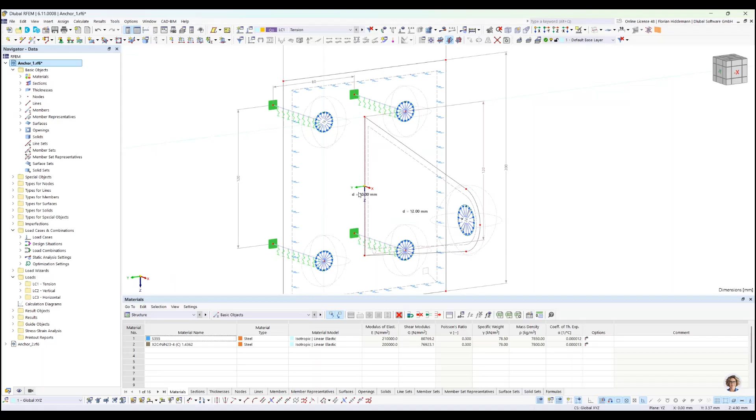Thank you, Andreas, for the nice introduction, and welcome to this webinar regarding optimization together with the add-on stress-strain analysis. What I would like to show you today is a small model where we want to optimize the geometry, in particular the plate thicknesses and the length of this plate. In the first step, we only play around with the plate thicknesses, and the second model will include some changes to the whole geometry of this plate as well.

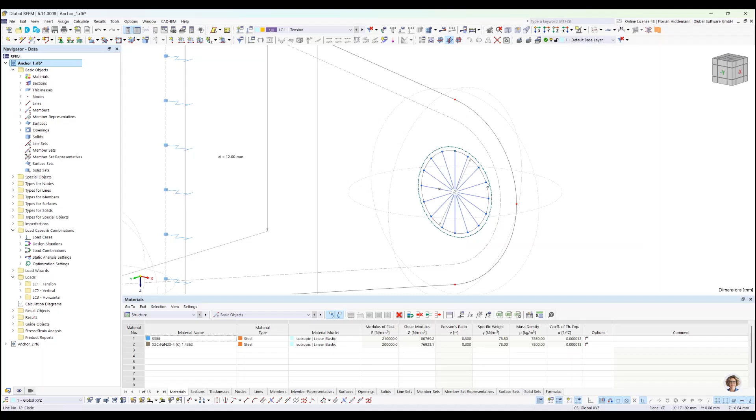This will be the only model we have a look into today. I would like to show you the basic initialization, the setup for the add-on optimization, and how it works together with the stress-strain analysis. We'll do some design setup here as well, and I'd like to point out some nice details in this model, for example how to properly model some screw connections, or how to get a more realistic result regarding applying loads on holes like this, with a backend plate using a non-linear support for the surface.

So just to walk you through the model we are looking at today, the overall goal is to find a geometry which fulfills all our specified design needs and achieves the minimum weight of the whole construction. So let's assume it's a facade connector or anything like that, and we would like to improve the material costs for several of these connectors.

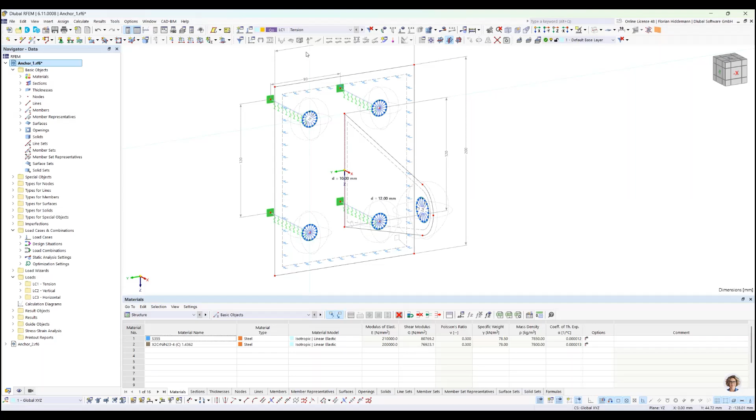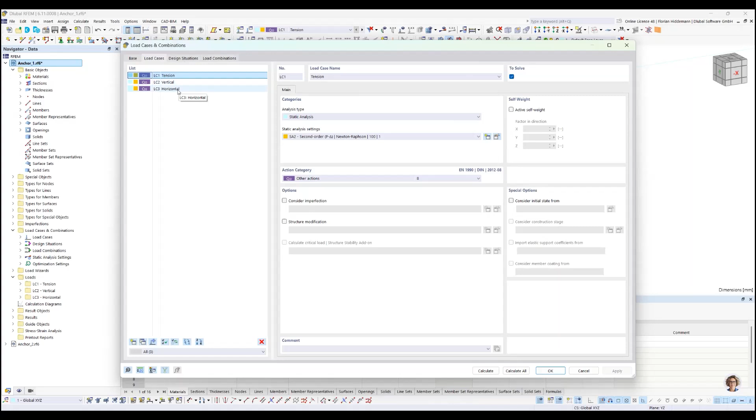Let's start with the loading. Here are three simple load cases defined. The combination wizards are turned off. We only need for this small example a design situation which contains some loads and design criteria used in the design add-on, and we have tension, vertical and horizontal force, just as other actions.

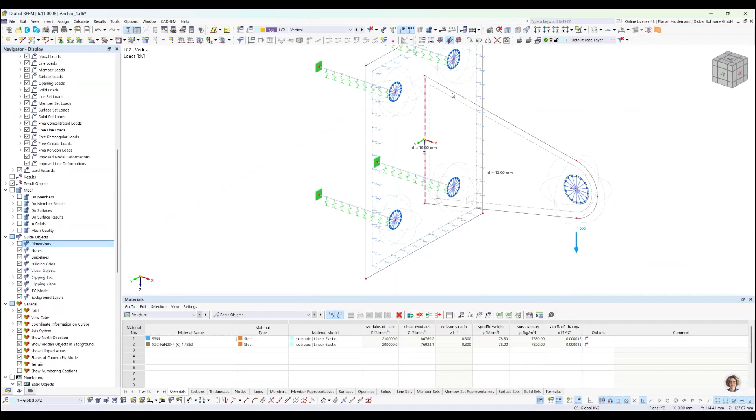And the forces here are applied on this single node behind the dimensioning. Let's turn this off for a moment so you can see it here. There is node number 10, and we apply a tension force in this direction in load case 1. In the second load case, we have a vertical force and a horizontal one, which will bend this plate around the weak axis.

So how is the model working? As you might see here, we have some nonlinear members. And if I activate the transparent model, you can see that these try to simulate a weak beam section here.

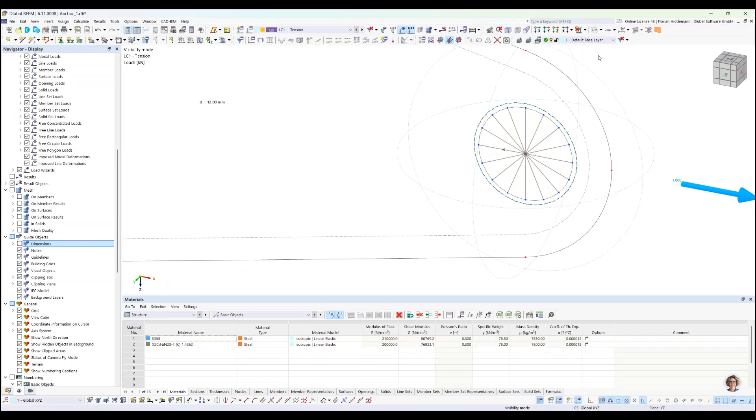The model dimensions for these beam elements are chosen in a way that the surface area of the connecting part for the beam end is the same as the area for the cylindrical surface inside this model. So if we make them invisible and show the transparent model, I choose a surface here where you can calculate with the diameter and pi the surface of the cylindrical area, and then model some beam elements which would have the same area.

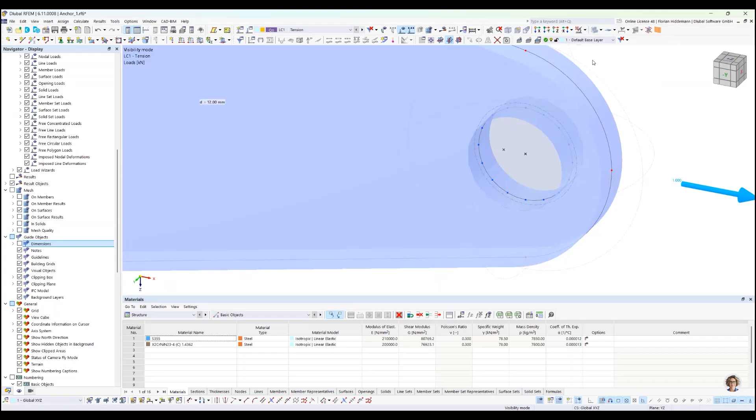We made some good... this is our recommendation for how to model this kind of screw connection, to have some effects regarding displacement of the hole itself and let the force find its way into the connecting plate here.

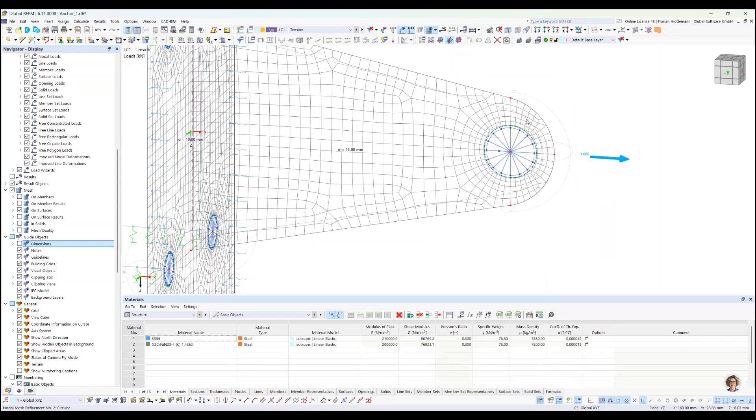Around the structure, there is a mesh refinement, so we would like to see a finer and nicer mesh in this area. Here is a radial node mesh refinement defined, circular. Even if this is bigger than the connecting plate, you can see that we have a nice structure for the mesh.

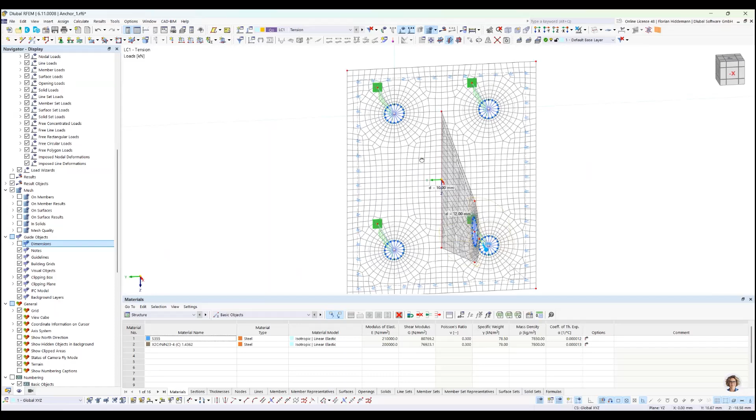On the plates itself, there are also defined some mesh refinements which make smaller elements, just to ensure that we have a good looking, well distributed fine mesh here. The same is done with the holes in the plate, which model the screw connection to the building. There's a circular node mesh refinement with the same settings as before.

The whole back end plate is supported with a nonlinear surface support. This is just to give a more interesting example, as if you have concrete under it or a filler or whatever, modeled with failure if negative contact stress, so we only can transfer positive pressure forces, and we are free in both lateral directions.

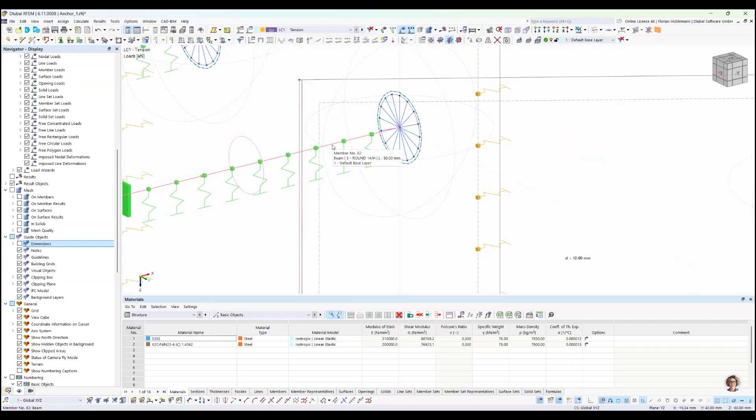Connecting to the center of these holes, there are beams with a round diameter of 14 millimeters. In this simple example, they just represent some dowels or anything connected into the building, and they are filled out with glue or something. I'm sure in your project you have the right and correct assumptions for that, and they are also supported.

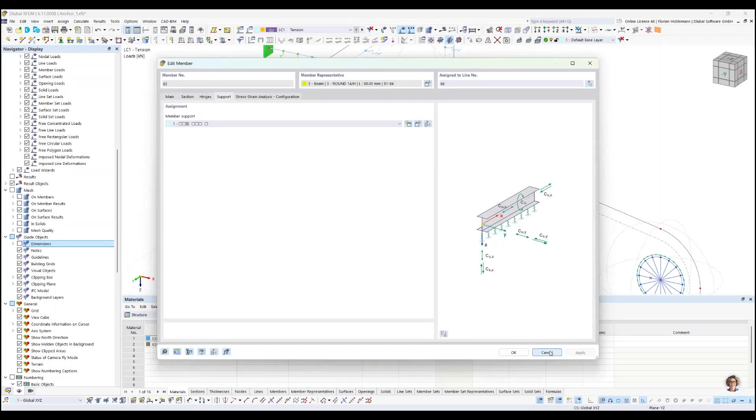All around to restrict the movement here with a spring constant that also simulates some bonding inside the first 80 millimeters of this connection. So it's a small example here, these are millimeters. We have these dimensions here to get an idea of what we are talking about.

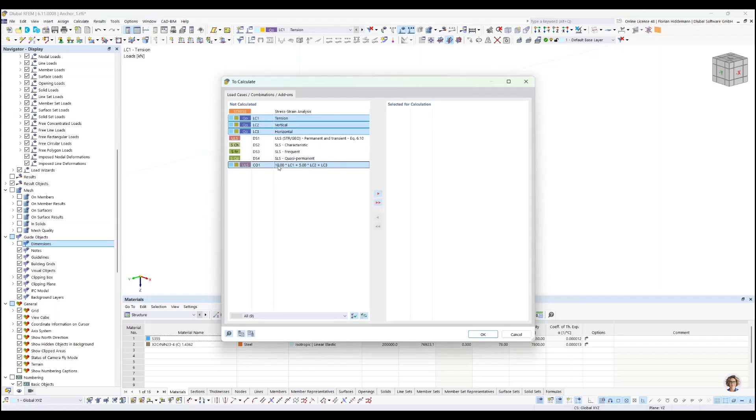Okay, and to get a feeling for the system behavior, let's just calculate for now the static analysis. And after that, we will set up the stress strain add-on.

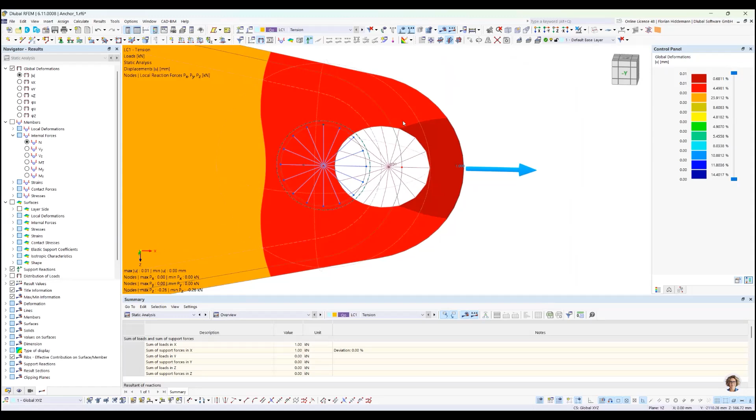If we have a look at the deformations, you can see we are pulling with the tension load case here, and the hole is deforming as well. It seems that we apply pressure only on this side of the hole, like we intend. The plate here is obviously deforming in a way that we can expect some contact stresses, which would add some small forces to the bars.

We can see this as well. If we pull with 1 kilonewton in this direction, we get 0.26 in each bar. So it's a symmetrical load, but a little bit higher than expected.

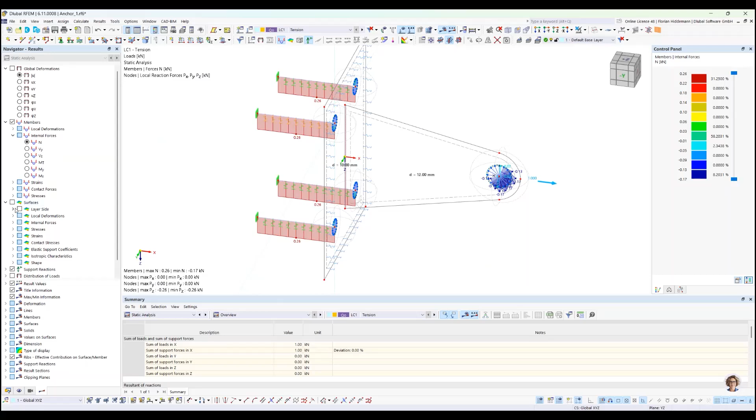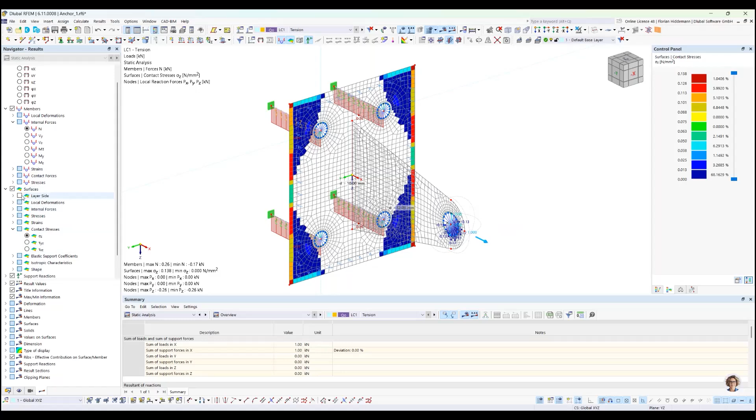Maybe you can see this in the contact stresses. Here on the edges, because of the plate deformation, you get additional forces due to the fact that the band and plate is leaning against the building, and applying another lever arm, let's say, on the bars here as well.

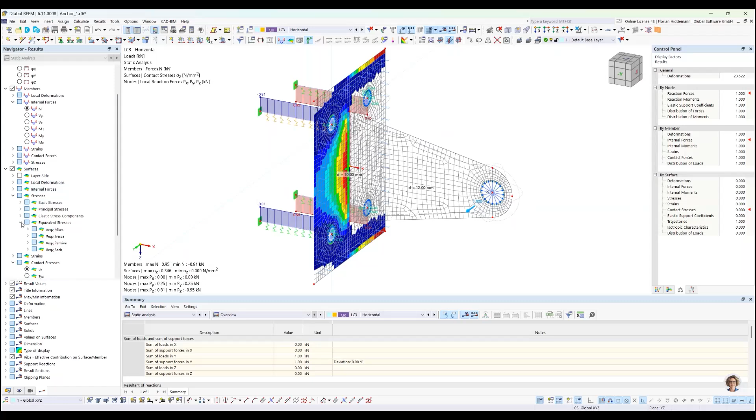So it's a little bit more interesting. In the vertical direction, we can see we have pressure forces here on the bottom side. Here on the upper part, it's free, it's a nonlinearity. And if we bend it on one side, horizontal, we also see this in the normal forces. And if we switch on equivalent stresses for the plates, you might see that we are dealing with a logical system here.

Okay, and what do we do now to add some criteria to dimension it properly? In the stress-strain analysis, we have several options to define limits, and we start with the surface configuration.

Because we have defined some material here, we make use of the parameters in our material library. So the add-on for stress-strain analysis will use the parameters from the material and limit normal stresses as described here in these formulas.

What is important to know is that the design add-on here uses totally different results than the static analysis. So if you limit sigma 1, sigma 2, and for example this equivalent, it might have the same results also in the static analysis, but it's calculated based on the design checks defined here on the right side.

So if you have sigma 1, for example, you can check here what is calculated behind it. And if you want a user-defined limit for this, you can also input the absolute value you want to use, or define a user-defined factor. If you don't want to design for 1.0, you can, for example, restrict this to 90% of the allowed limit according to the used material. So you are free to edit these values here.

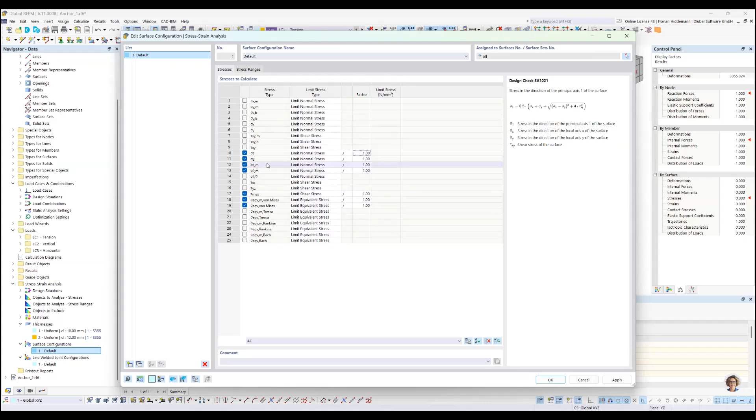By default, they are mostly according to your standard and code you have defined in the background. You can even change the factor here if you want to multiply that by 2, to allow double the allowed value. You can do that as well. But here in the default state, we check these parameters, and these are then in the following criteria to say this is a valid or not valid result. This is important for the optimization algorithm later.

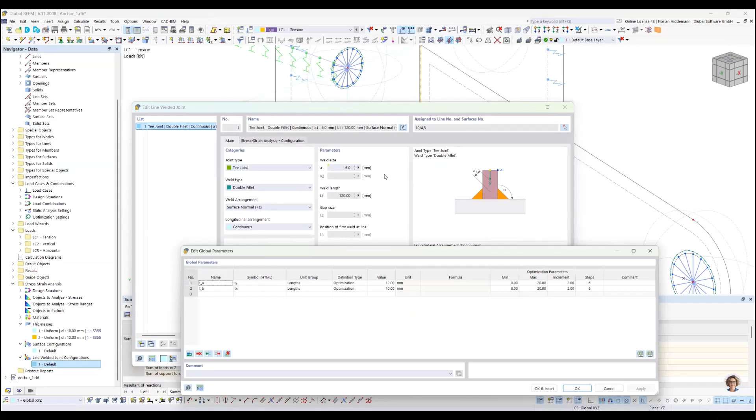We also defined a line weld joint, and in the model we can see it here. It's defined between both of these plates, just makes it a little bit more interesting here. It's a T-joint, double fillet, and the weld size uses the global parameter we've seen before. It's half of the measure of the plate thickness, so on both sides you have 6 millimeters for the weld joint here.

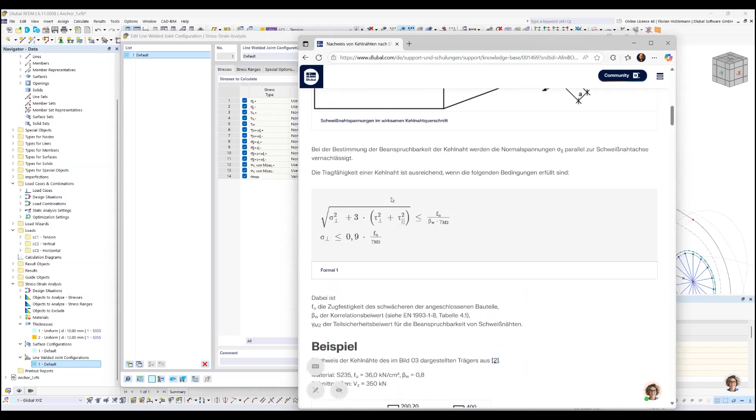And there's also a stress-strain analysis. Maybe you know this article from our knowledge base—it's also available in an English version. Here you can see we have an article on how to calculate and design check such joints. According to that, I calculated, you can also find it in Eurocode, the stress limits I will make use of here.

At the moment, this line welded joint doesn't take it automatically from a material and make these assumptions, so you have to calculate them on your own and define them as user-defined limit stresses. If I do it for material class S355, you can see that we have 436 for the comparable Mises stress, and for the normal forces in direction of the back end plate, we use 353.

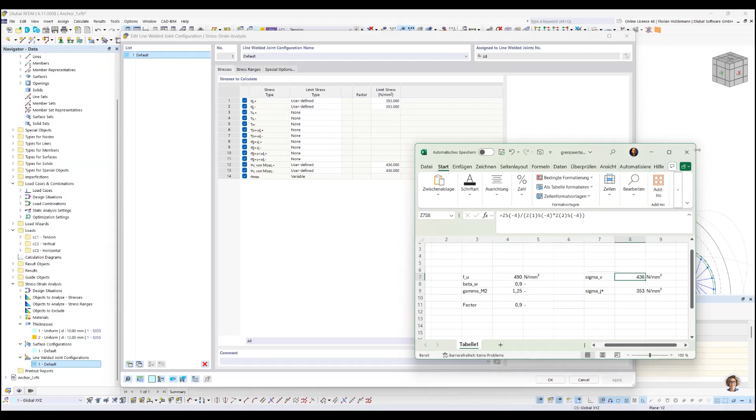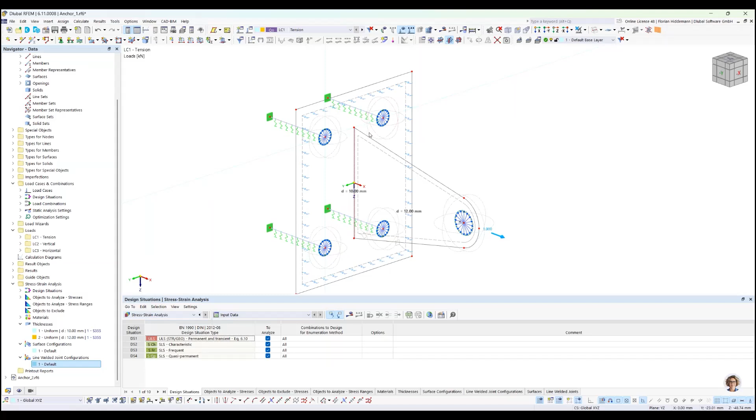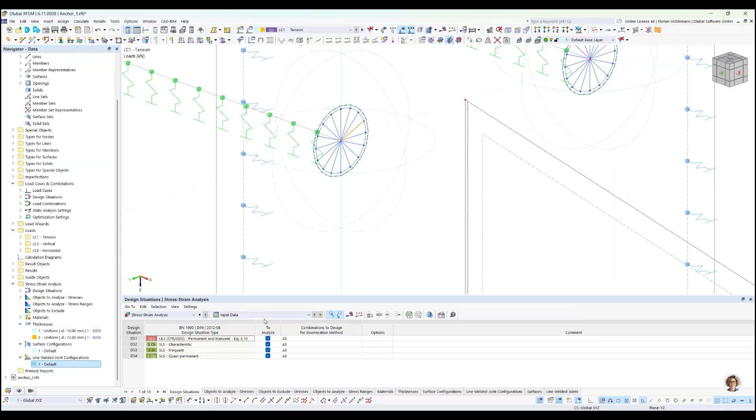Also, the last configuration is about the beams here. You can also activate these beams, and I will show you this in the example. If you switch here to the stress-strain analysis, obviously we don't want to calculate all these other members we have here because they are only used to model the forces on the plate. Yeah, we can have a look at them. These have a non-linearity and they fail if they get tension forces, so they only apply pressure forces and have a custom flat cross-section, and we don't want to have them in the stress-strain analysis, but we would like to see the other members.

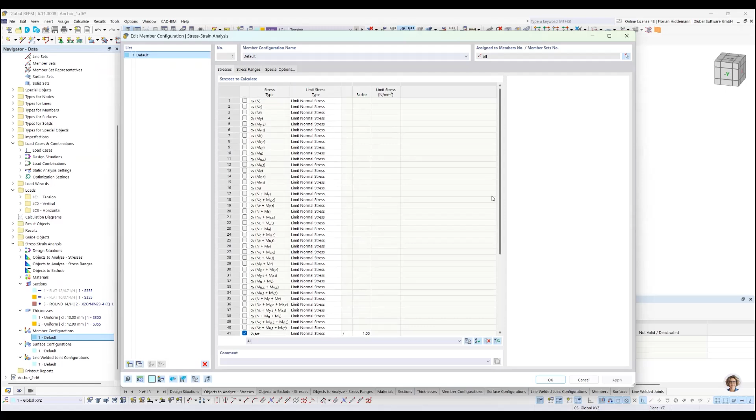You can go just to the input data and define the objects where we want to analyze them. So I just manually select these 4 members. And now you can see here, we saw sections, and we also have now the sections here and member configurations. In the member configuration, there are a lot of different options to edit the limit stresses, the limit normal stresses here. We just go for the standards, which make use of the material parameters, but obviously you can use a lot more information here.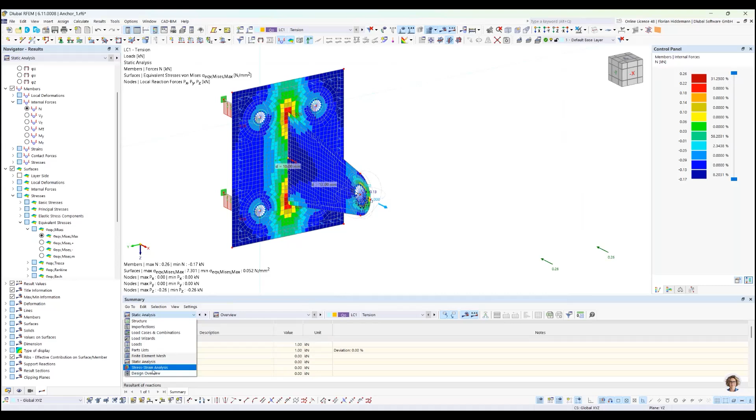So for now, let's see how the system reacts. If we calculate the stresses now with the current configuration, let's see what happens. We go to the stress strain analysis, to the governing results, and see, yeah, this would work. We have a valid result, but maybe this isn't the optimal configuration. So how do we go with this? How do we find an optimal dimensioning goal?

Just to remember, we have the global parameters here defined, which we make use of. So everything that is a global parameter can be used for optimization. If you do it like without the add-on optimization, you have the ability to define these as a value. But if you have the add-on optimization activated, you can define these as an optimization type. We make the simple version today, we don't go for ascending or descending options, it's just optimization, and then here on the right side there appears the optimization parameters.

You can define for each parameter the minimum, the maximum value, and increments and steps here. So in total, we would have seven states for this variable which we want to try out, and 7 states for the other one, including the minimum and max value.

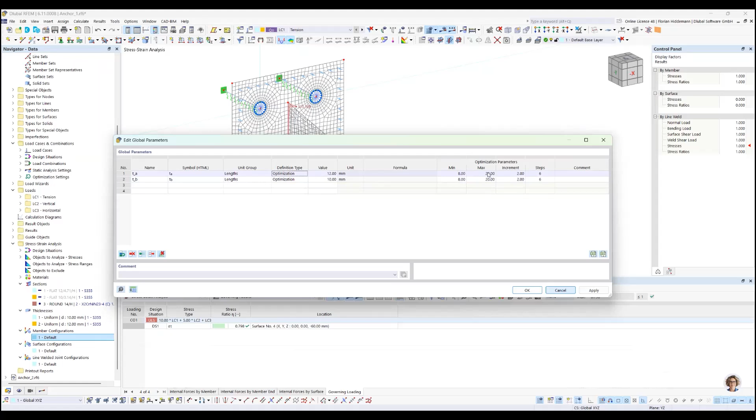Under the menu for calculation, you can find the optimization settings. In the optimization settings on the right side, you see these global parameters which are set to optimization. Here you can also define later on if you want to make use of them, vary them in the way specified with minimum, maximum, and the steps in between. This has an influence on the number of possible mutations. If we have 7 states for the plate thickness A and 7 for B, we come to 49 possible model variations.

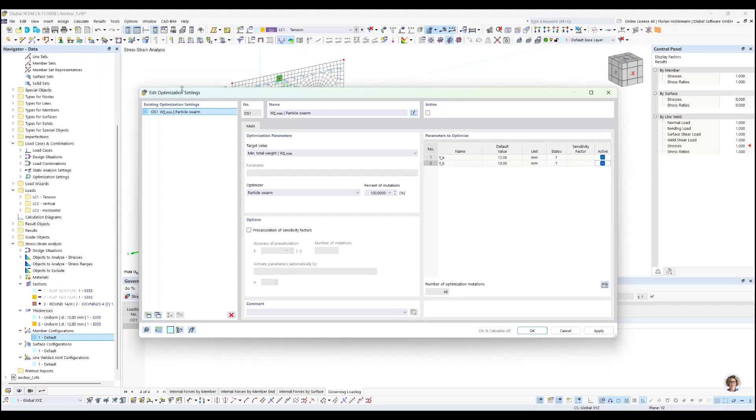In this dialog, we set the overall goal, the target value. This is one of the most important settings here. There are also some other options, and in the future we would like to add formula-based evaluations or other result types to give more flexibility regarding your optimization goal. But at the moment, these are internal concepts. So for today, we optimize for a minimum total weight of the construction.

For the first example, I would like to use the optimizer 'all mutations.' This is a dumb method that varies all possible states. The clever part of this add-on, which I'll show you later, are the algorithms we can make use of, which try to follow a more scientific strategy to find the best possible parameter settings in the shortest amount of time. So for now, let's calculate with all mutations.

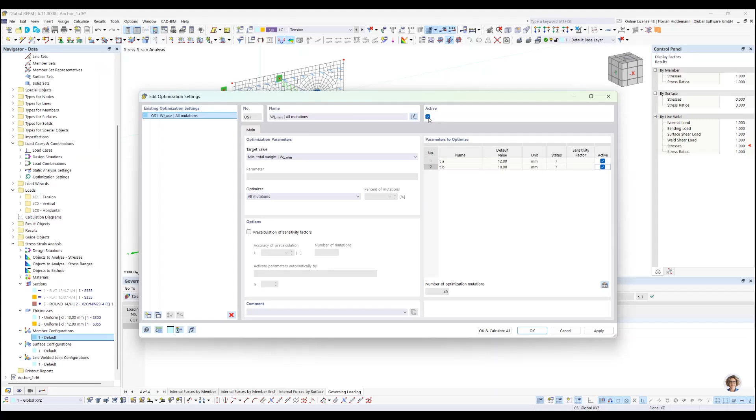What's important is that every time you want to make use of such an optimization run, you have to set it active here. If you calculate now and reopen the dialog again, this will be deactivated. It's a mechanism that tries to avoid unwanted calculation runs one after another.

So what will happen now? We won't calculate all 49 possible mutations because we have some clever strategy inside this model. In the background, it will now try to calculate the models until it finds the best valid one.

What the add-on optimization does now is varying our two parameters, and it evaluates with the target value here. The red exclamation mark means that our activated design add-on has at least one design check which doesn't fulfill the design limits. So if any design check exceeds 1.0, or whatever is defined there, a red exclamation mark shows that this is not a valid result.

If we found a valid result, it will be a green check. There is also a third option which we'll see in a few seconds, because we try to save time here. Now we have just a calculation with all possible mutations, but soon we will see that with a special combination in this example, we will have a valid result, and then something happens I'd like to show you. This is kind of an internal improvement.

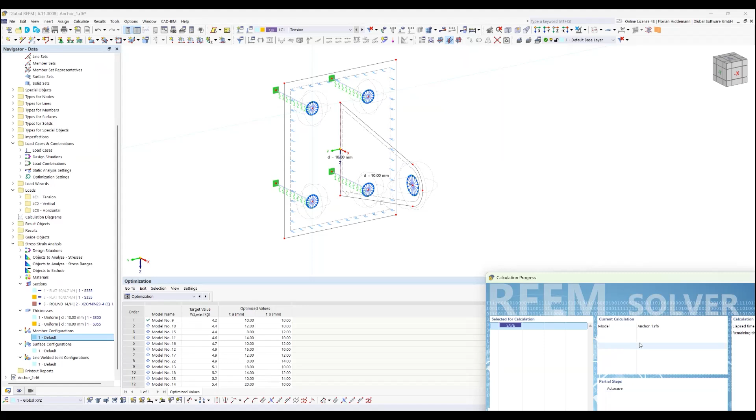We see that no combination with plate thickness of 8mm leads to a valid result, but now we have 10, 10 as a valid combination, and suddenly we jump to the end of the calculation run without calculating 30 more variants. Why is this the case? You can see here that there's also a blue marking which says, okay, these are not calculated.

The optimization add-on found model number 9 with 4.2 kilograms as a valid result. And it calculates in the background what follows from the geometry. If you take this geometry, you can calculate without calculating the RFEM results by stresses, design add-on, whatever else. You can also say, okay, these parameters will lead to a weight of the construction of 5.4 kilograms or 7.0 kilograms.

And since all these results would not be as good as our model number 9, we skip the calculation of the design add-on here. So it saves a lot of time until there is a possible mutation which would lead to a better weight than 4.2. And since this is not the case, because everything that could be better than 4.2 was already calculated as not valid, we skip these and have the best one in the result.

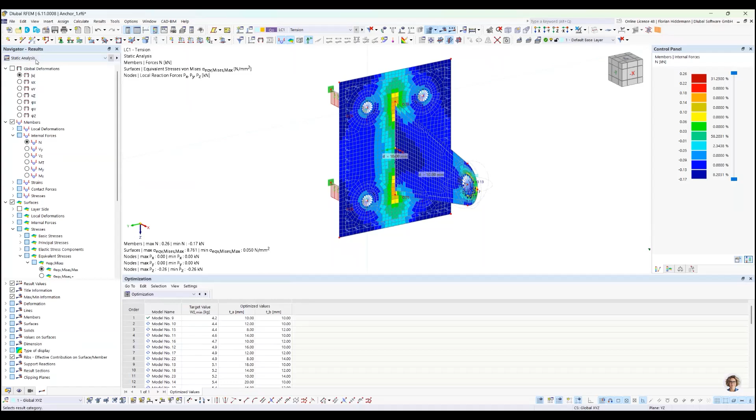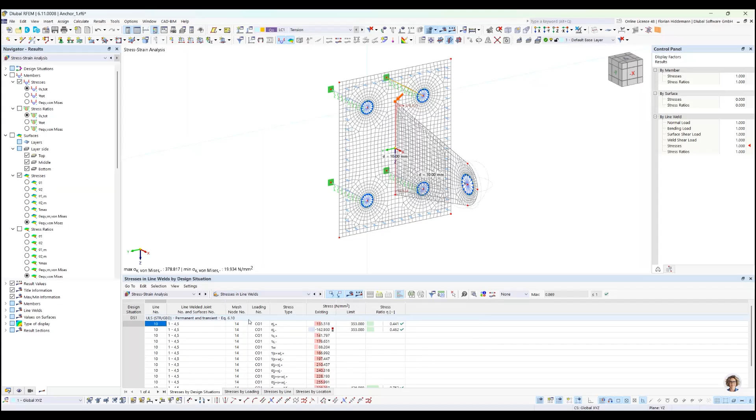So we can check in the stress strain analysis and see in the governing results we have around 90% as a maximum usage, and we found the combination 10 to 10 for the plate thicknesses. This includes the evaluation for the members here for these 4 bolts. It includes the stresses which are set with sigma 1, sigma 2, and the von Mises equivalent stress, as well as our custom defined stresses in the line weld.

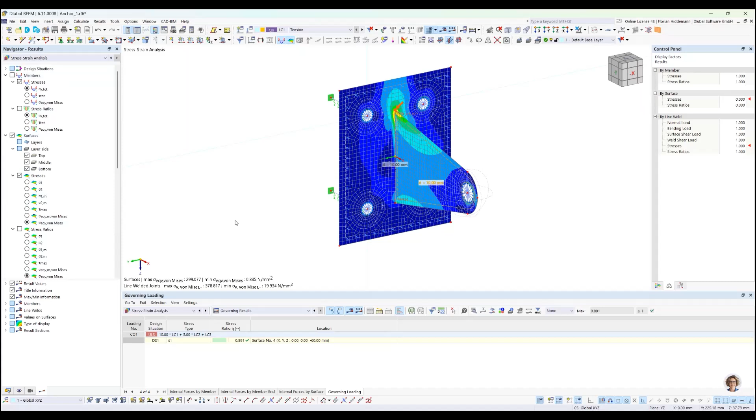So that's it. The add-on gives feedback to the add-on optimization, what is valid, what is not valid, and varies these results. And with 49 possible mutations, it's

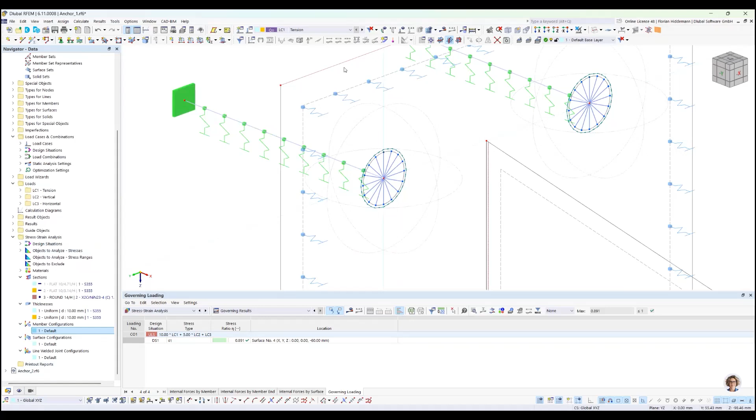affordable to just have a look at all of them, but it gets a little bit more tricky if you have further parameters. And now we are enhancing our example here, and later on we compare this with a pre-calculated version here.

So what we want to do now is also make some variation for this part. I already measured it, for this length here for the plate where the load is applied. Therefore, we go to the global parameters, make a new optimization variable, because this is the one we want to find in this small example, and we vary it from 80 to, let's say, 140 with steps of 10.

So it tries to help me here with some assumptions. Sometimes you have to move back and forth because it's calculating 6 by 10 and then the end or beginning value. And as you can see, we have now a third variable here.

And with this variable, maybe you already know, you can use these formulas directly into some coordinates or other input fields. And just to demonstrate that it's also possible here, we can use a formula directly in the global parameters, calculate some coordinates here.

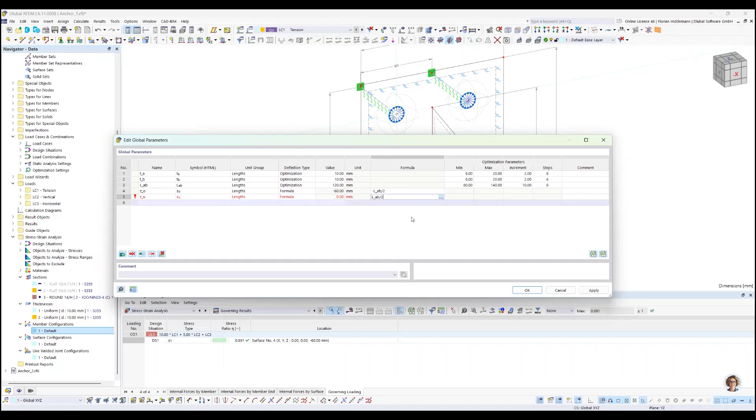That's half of this length. And now I use them here as the z coordinate for this node. So this is the upper part. And also for the lower part.

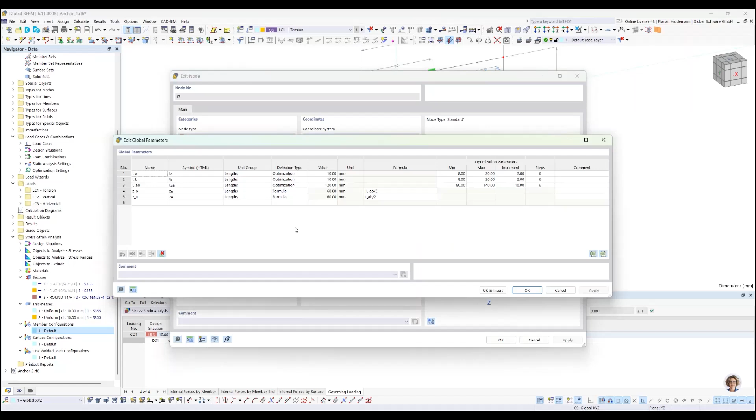Okay, and now we have another option here. And if you change this value, we can see this directly affects the model. And of course, with a lot of fantasy, you can build some more or less very complicated models with formulas and calculations, volumetric bodies, which are constant geometry, etc., whatever you might want to model. For this small example here, just gives another variation.

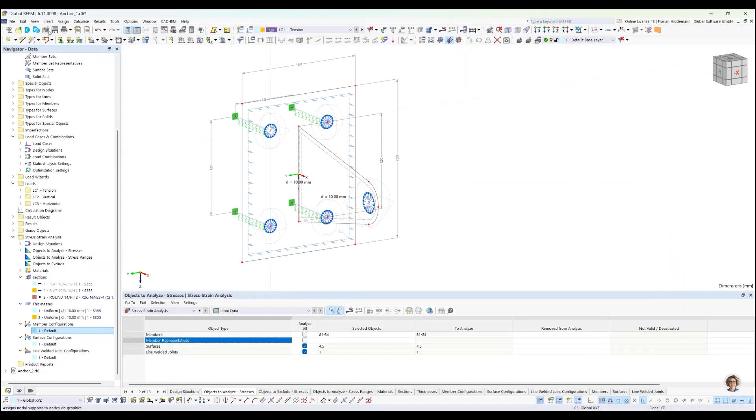So if we go back now and want to optimize this, we see, if we want to calculate all possible mutations, we have 343. And this might be a lot. And if you add another parameter or make smaller steps, let's say 5 millimeters, it's getting bigger and bigger.

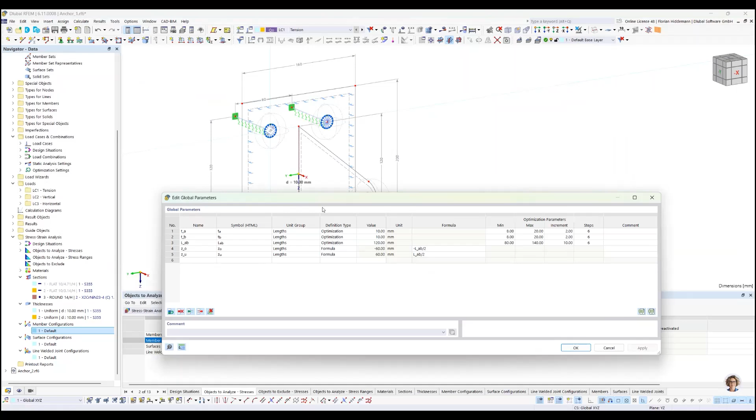Let's just do it here in this example. We say, let's do an increment of 5 millimeters up to 150. And we have 700 mutations. Yeah, and if you have a fourth parameter like material, cross-section, you can optimize with a lot of different parameters here. It explodes very fast, that you have thousands of different mutations.

And we have some strategies built in for this reason. If you choose for such kind of problem, the particle swarm is very convenient. If you activate this, you can limit the maximum calculated percent of these mutations. So if we would go for 5% of the mutations, we will calculate 5% of 735. And let's do this right now.

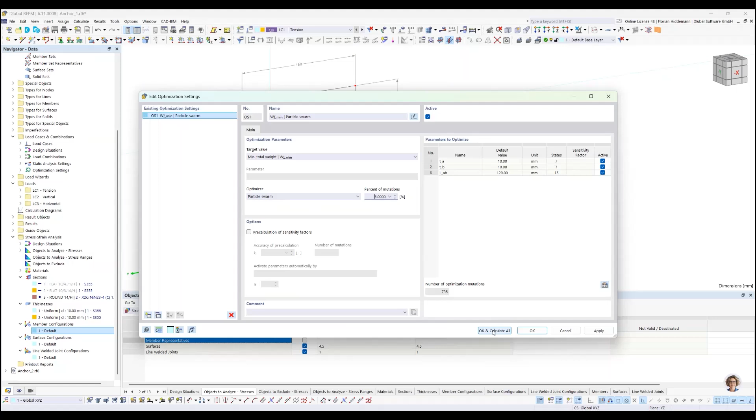So the algorithm won't just go stupid, holding one variable at a fixed value and then counting the other up. It has a look on the sensitivity for each parameter, which leads to a valid result with an optimized target value. And here, luckily, with the random mutation, it found a result, but we already know this can be much better. And the algorithm is trying to find with mathematical and scientific strategies behind the best mutation in a short amount of time.

And it will at a maximum calculate 36 models now because we set it up to 5%. If we have, like we show in the first example, some models which exceed the best optimization goal from this run, we will skip the calculation, which makes it even faster. So the 36 combinations here are also quite fast now. And we already found, with varying this length, a much better system than before, where 8 and 8 is also possible.

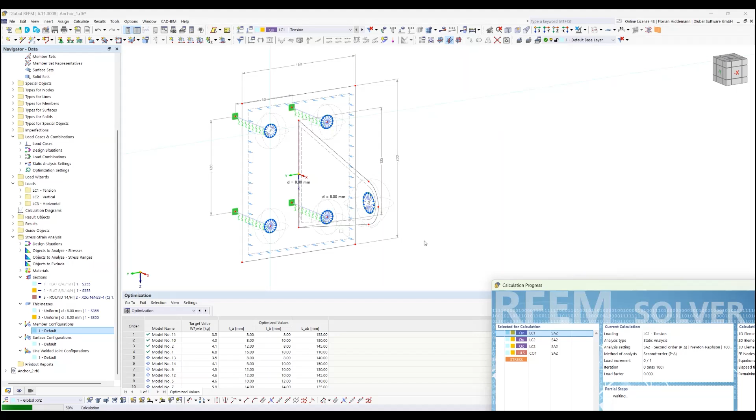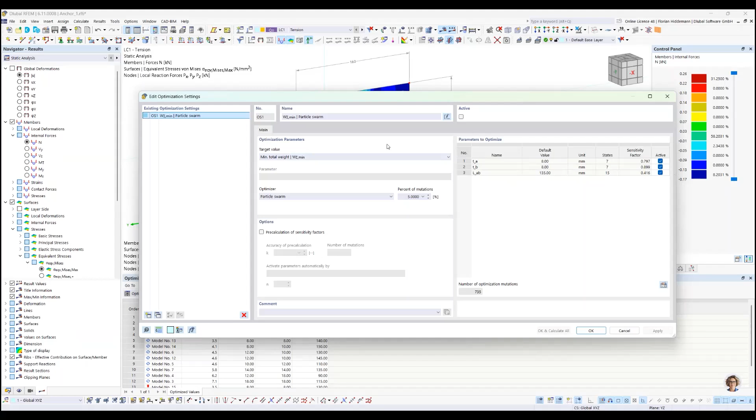So what is special, what is nice to show you and demonstrate here? If we go back now and we have calculated results into the dialog for optimization settings, we see here some sensitivity factors. And these sensitivity factors represent the influence of this variable to an optimization goal. So this parameter for the plate thickness B is more sensitive to the target value and the valid result than the length of the plate here, according to all mutations calculated up to this point.

And we built in, it's not easy to understand, we have to admit, but if you activate the pre-calculation of sensitivity factors, RFEM will do a two-step calculation to achieve more refined sensitivity factors here. In the first step, it calculates an amount of, if you make the k factor 2, 60 possible mutations.

Then the add-on has some sensitivity factors. After that, an optimization run will be done only if some variables have a sensitivity greater than this value.

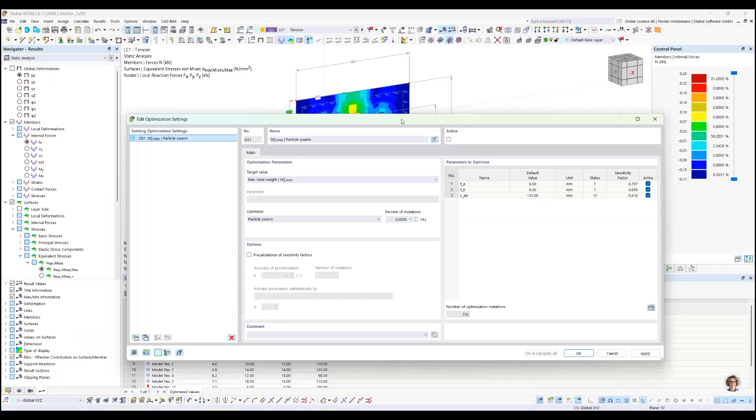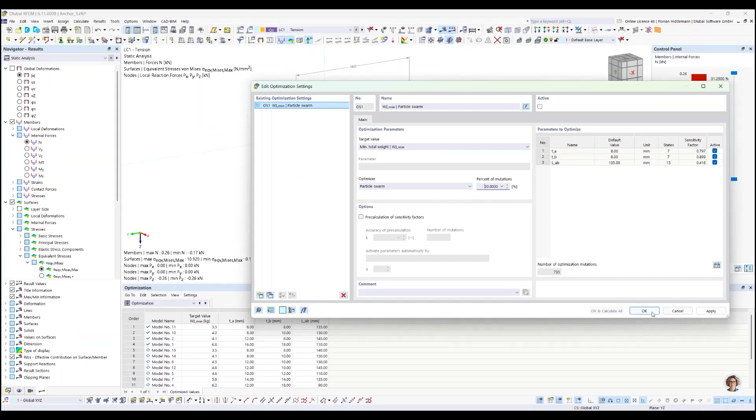Another big thing is that our results are now stored in cache. We made our first optimization run and have some results here. If we start another optimization run, for example with 20% of the mutations, and leave that as it is, and start the calculation again...

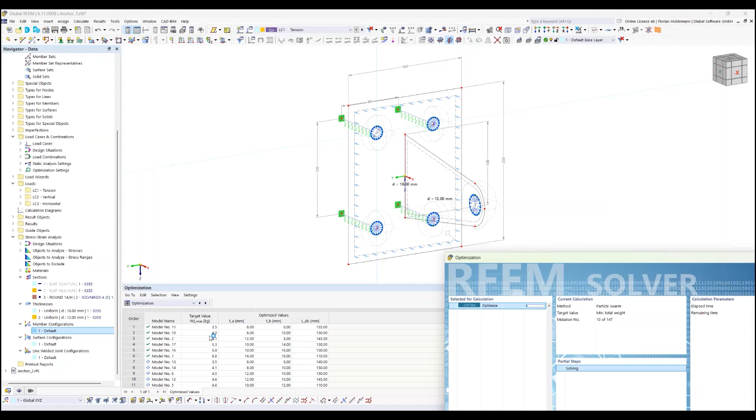Then we can see that our existing results are stored in the meantime. So they are not deleted, and the number we need to calculate is reduced. So you have the advantage that if you have intense calculation jobs, you can just store these models and calculate them later on if you have no changes in between with the model itself. And you can abort the calculation at any time.

And we store the best calculation found up to this point. So you can see we have model number 11. If you click any other combination here and want to see what the result would be, for example model number 20, just make a double click here and you can see that RFEM is setting the parameters as they are used here. Then you can calculate this current case.

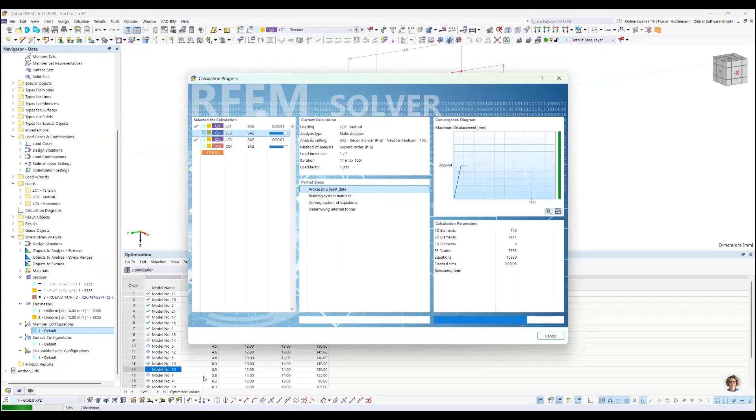You won't start another optimization calculation run here because it deactivates after each use. And then we see the results in model number 20.

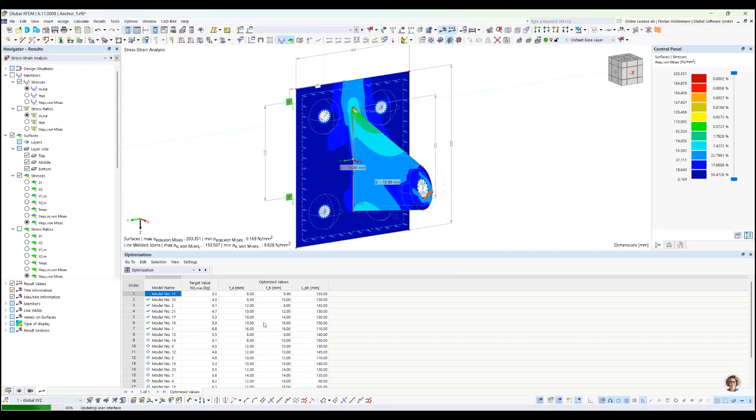Okay, you might see it would be valid, but also with a very high target value. So this is not considered as an optimization goal, an optimized goal. And these ones here are calculated because only the next variants which have less weight than 3.5 will be calculated then.

And yeah, now we had some very good options here, and we saw that we found, even with the 5 percent, a better optimization than in my prepared model here.